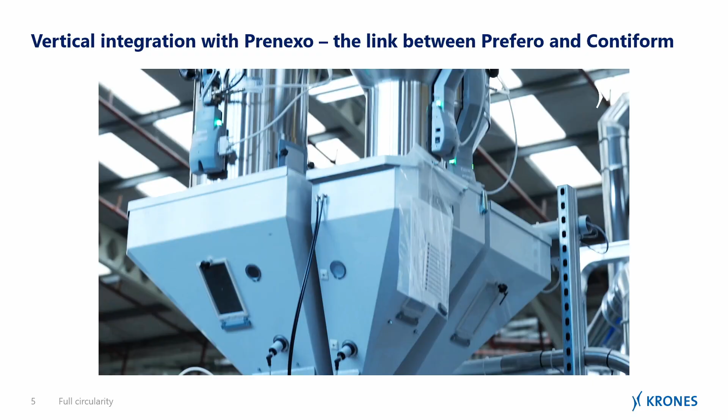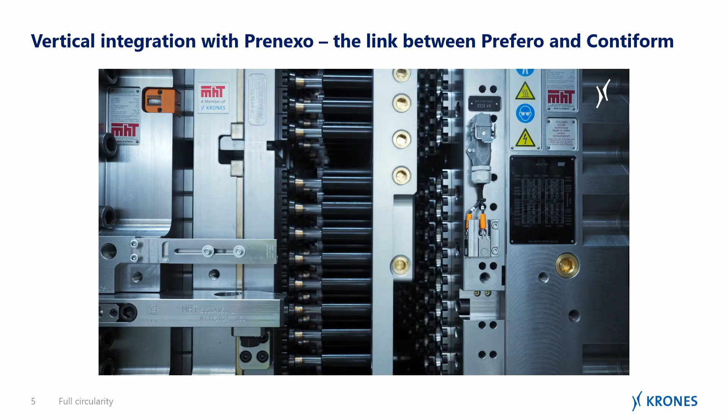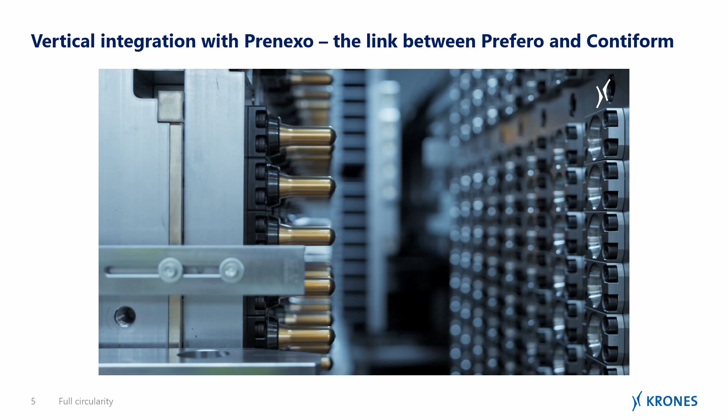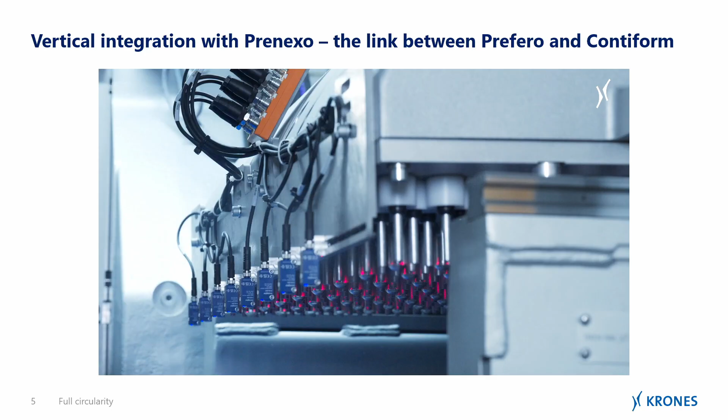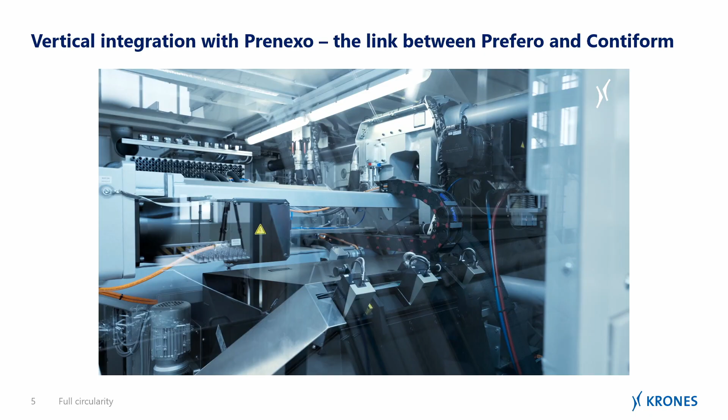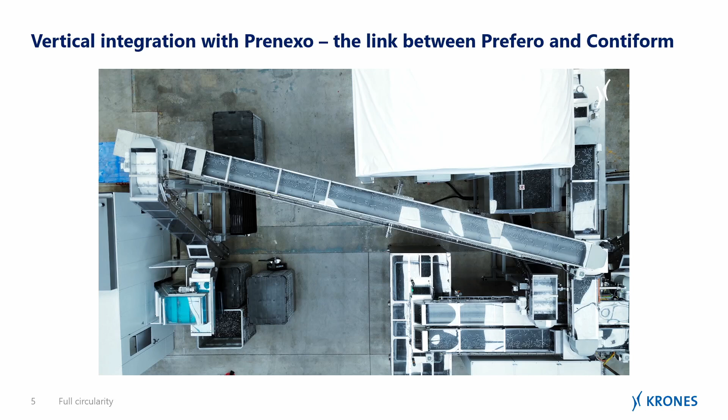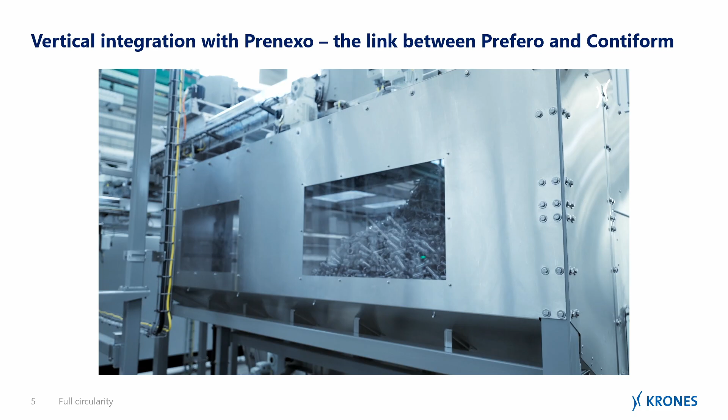And these preforms are directly fed to the line. You see the Prenexo system now from the top, so conveyor to the Prenexo system. From the top, you have seen it. Also possibility, you saw the tipper to tip the preforms into the line from the warehouse. Awesome. Yeah.

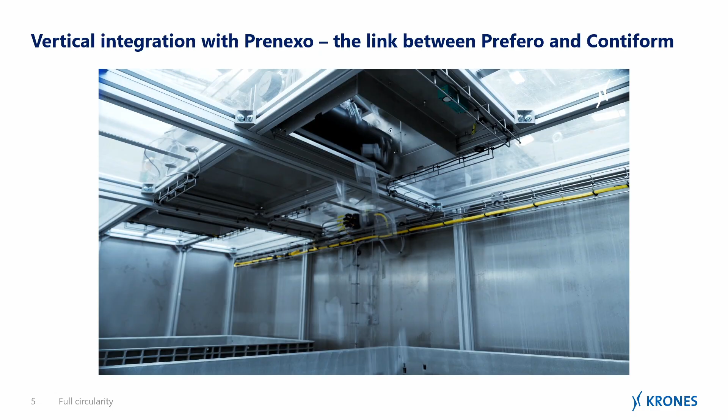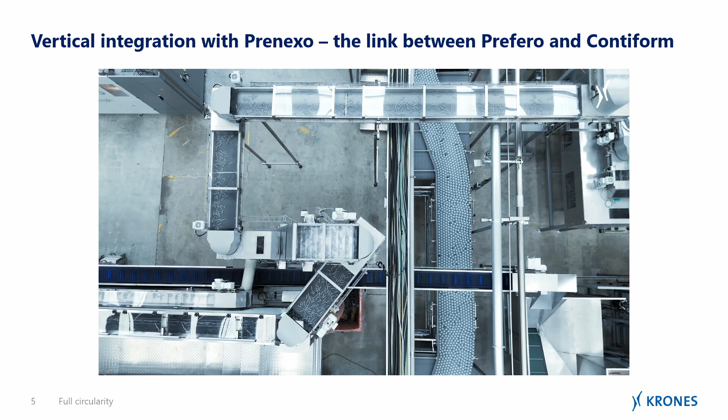Completely integrated, one philosophy. This is the station with the preforms to warehouse. So the excess production of the preform injection molder is transported to the warehouse for times where you have maintenance and so on.

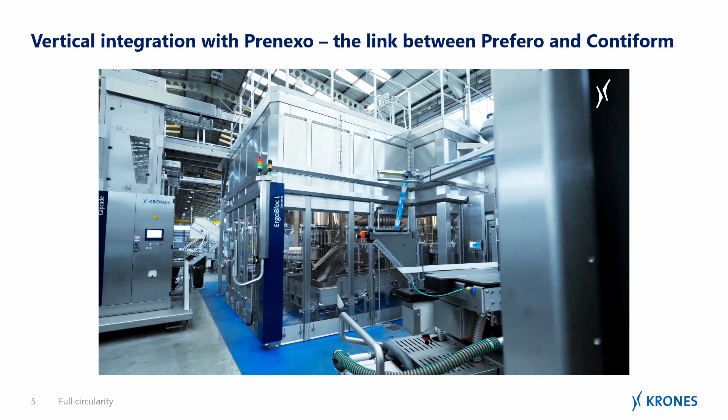Roller sorter feeding into the blower, bottle production, everything from Krones. Half-liter bottle, quite light. Labeler. So the line contains an ErgoBloc with blowing, labeling, filling. Talking about filling, that was a filler. It's a dual fill, 2 carousels, and then of course the dry part that also comes from the Krones portfolio.

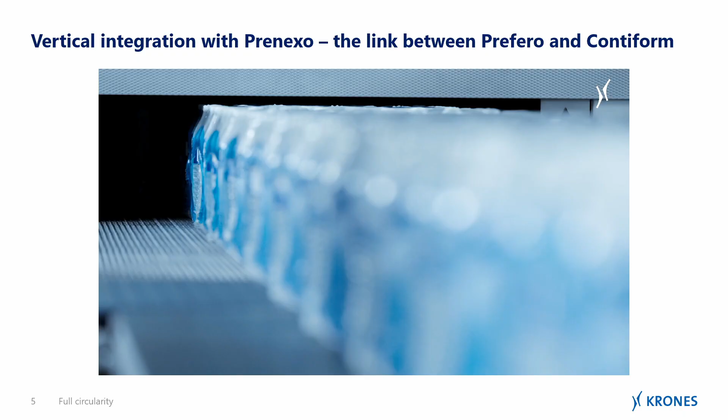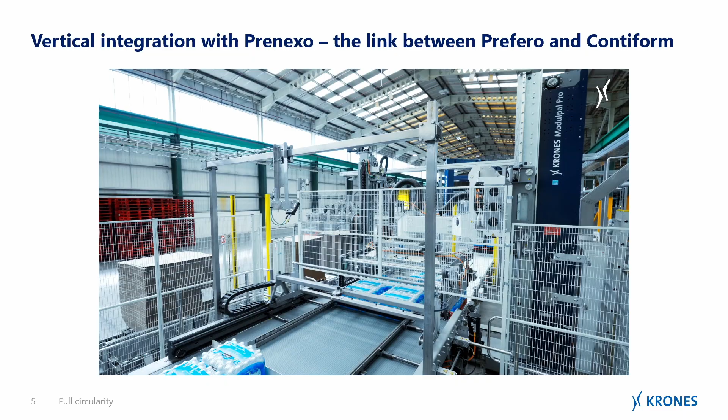Wow. And it's only possible to make these big and efficient projects happen with the right communication along the value chain, having everything under one roof. So now we are from the plastic pellet to the filled beverage on the pallet, going to the warehouse.

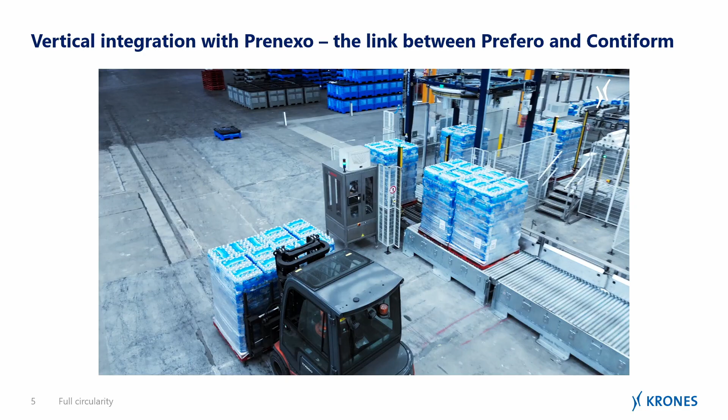Of course, when you're talking about consulting in terms of bottle development, bottle shapes, preform, you can always visit us over there where we have our bottle design, and over there where we have the features of the plastic technology, for example our new microwave flex wave oven, or also a small model of that connected preform manufacturing. As you see, there's so much to experience, explore, discover, get hands-on, and discuss with our experts, of course.